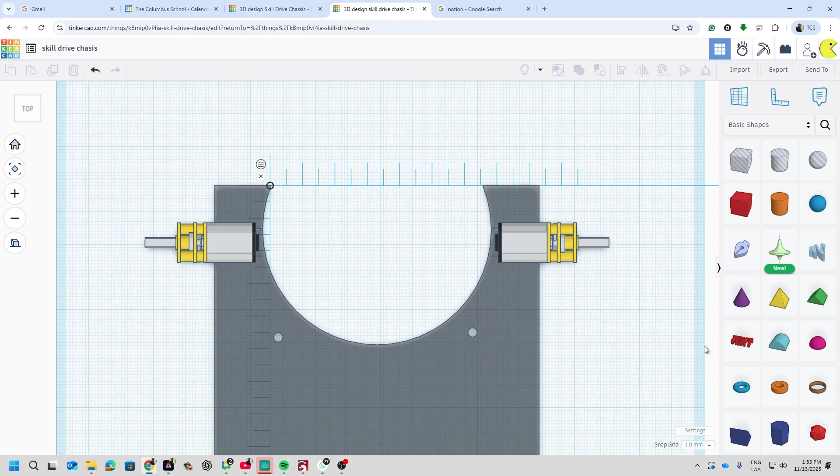Okay, so let's take back our project. Remember that every time we work on this, we are going to try to elaborate this chassis. This is the chassis that you guys are going to do for your skill drive robot. Okay, so we have the one that we worked on last class.

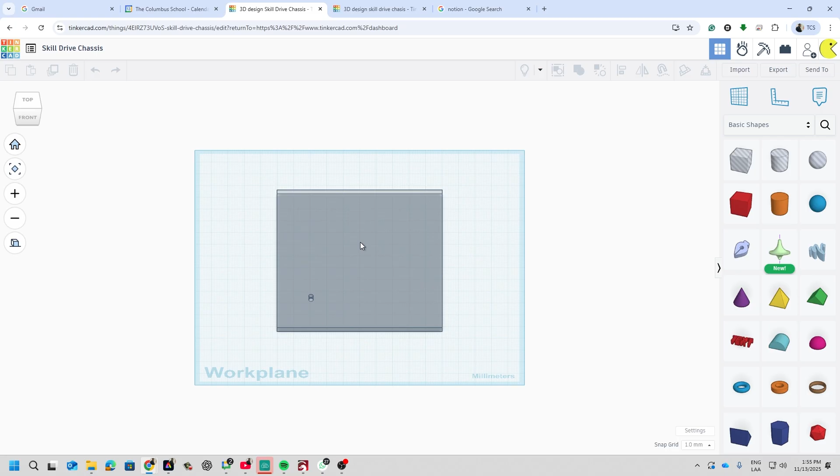We're going to click on the home button. Remember to look at your design, it's here. If you need to look up your username and password in order to start Tinkercad, I recommend you look at the sheet of paper that was given to you last class. Okay, so all of us are here.

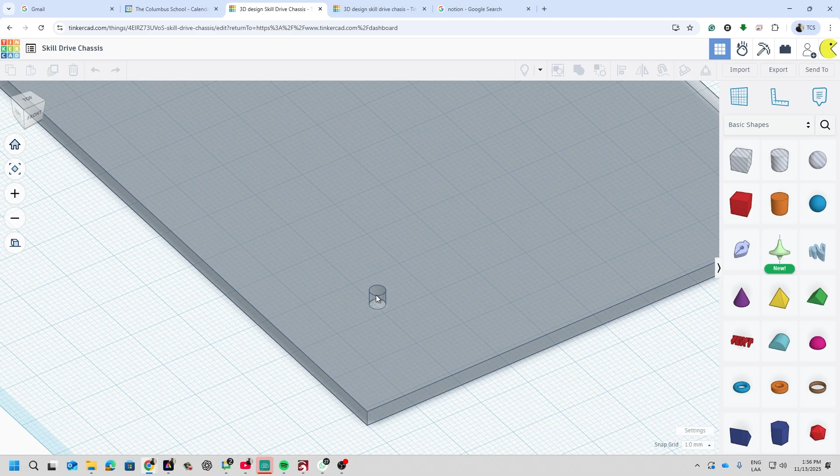We want to start working and creating the chassis. So first of all, let's take away this hole. You can just double click on it and select the solid that you guys created, then just delete it so we have the sheet of plastic.

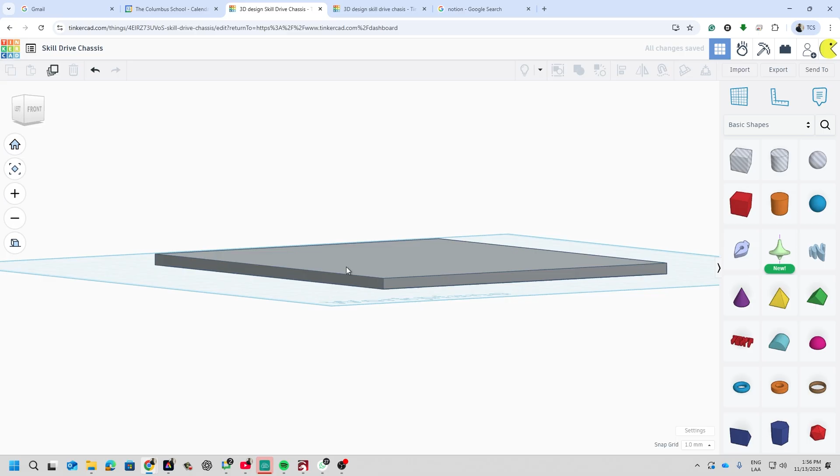Okay, so basically we have this. Quick reminder, we can change this to a solid and take off the transparency so we can see it as a pure solid layer. Remember this is 3 millimeters, okay? And I'm going to show you how to measure, okay?

So click on the top view, and if you click on the top view, you're going to have a ruler on the top right, and this ruler is going to allow us to make some measurements. So we can have it to the left, bottom, or right. We're going to keep it here so we know exactly what are the measurements of this object.

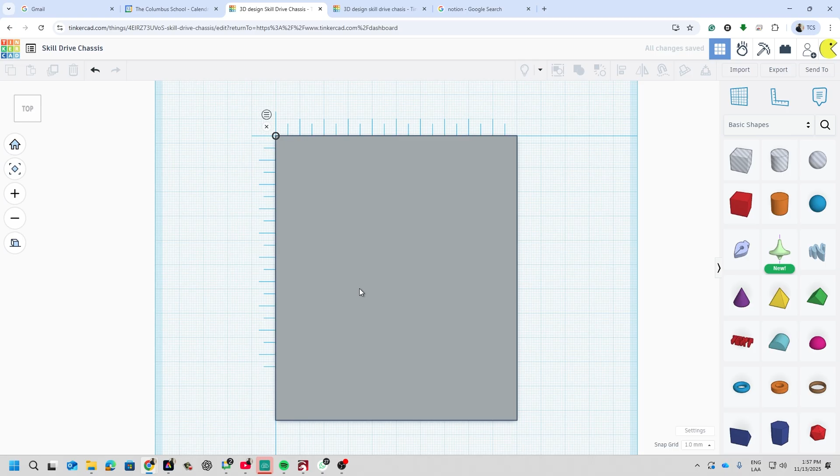So I clicked right on the corner of the object, and I can really quickly find the width and the length of my design. In this case, it's 100 millimeters and 117 millimeters - 100 millimeters wide and 117 millimeters long, okay?

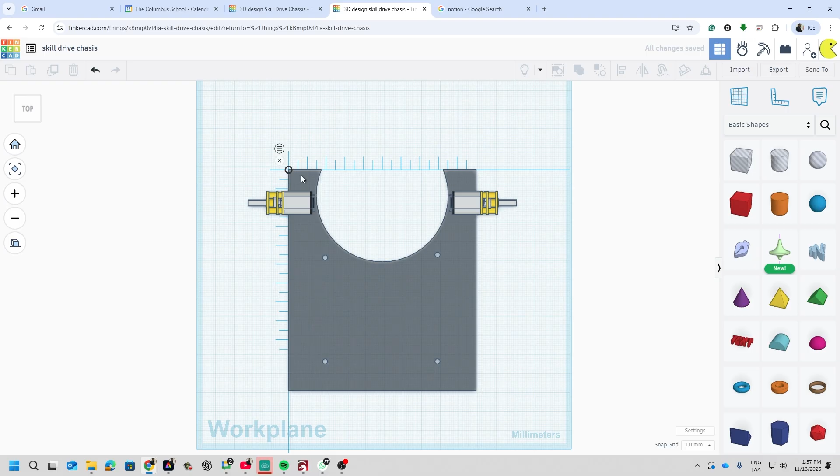And I can also set up, like, if I want the midpoints, it will show me the midpoint of this object, okay? So I'm going to move to the one that I already created, and I'll do the ruler again, and check what are some dimensions of this object. As you can see, it's 100 by 117, and the midpoint of this is kind of like 50.

So this is the center, and here I'm going to find out what is the radius of this object, okay? So I'm going to just erase this, and move my ruler right here, and then I'm also going to select, and what I can see is that from the center point, it's 58.5, and I also have some other information that I can get.

In this case, if I click on this button, I can see that it's 17 millimeters from the side, where I can see these holes that I'm going to create. I can also see, if I click again, that from the center to the hole it's 33, okay? And then I can modify it again and see some different information about it, okay?

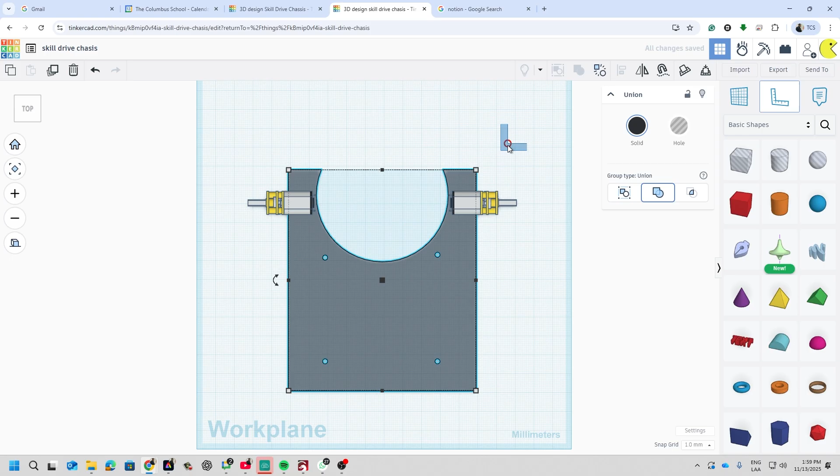So, let's see if I have others that I can choose. Let me see if I can click right here, and then I can see some other measurements. Okay, so after measuring and making sure what this circumference is, it's 70 millimeters of diameter. So we're going to create that same structure right here, right in the middle.

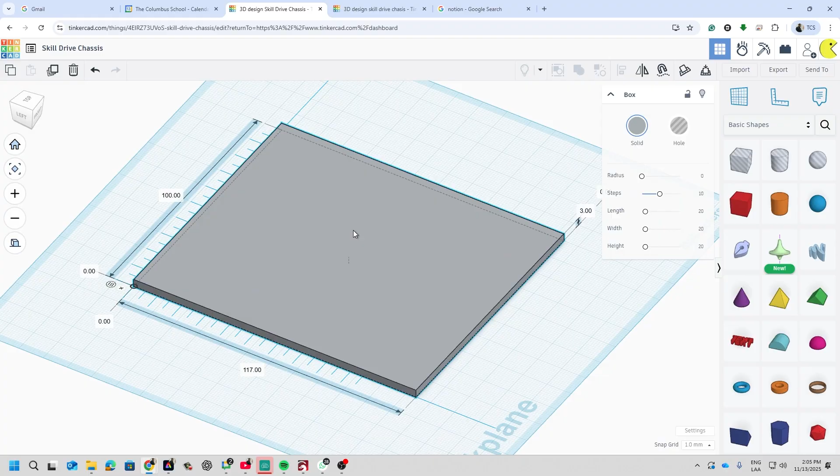Okay, so let's draw this right here. I mean, you just have to make sure - remember that you can define where to put it.

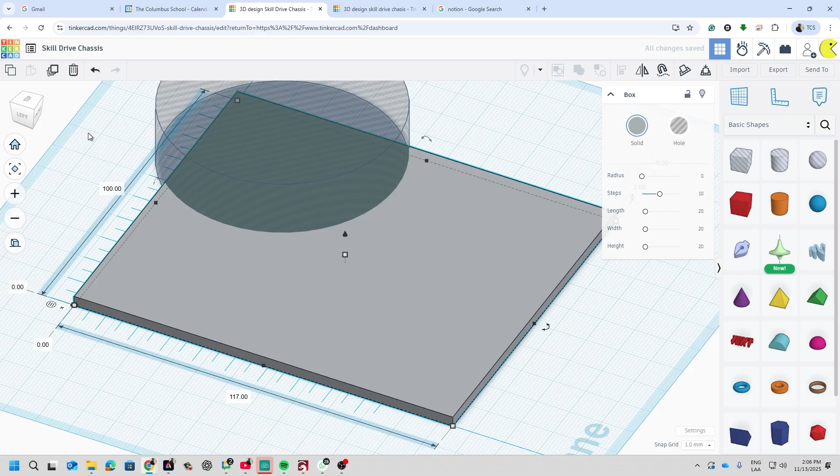Okay, we're going to create the length and the width of this cylinder. Remember the length and the width, and then just in order to make it right in the middle, you can always...

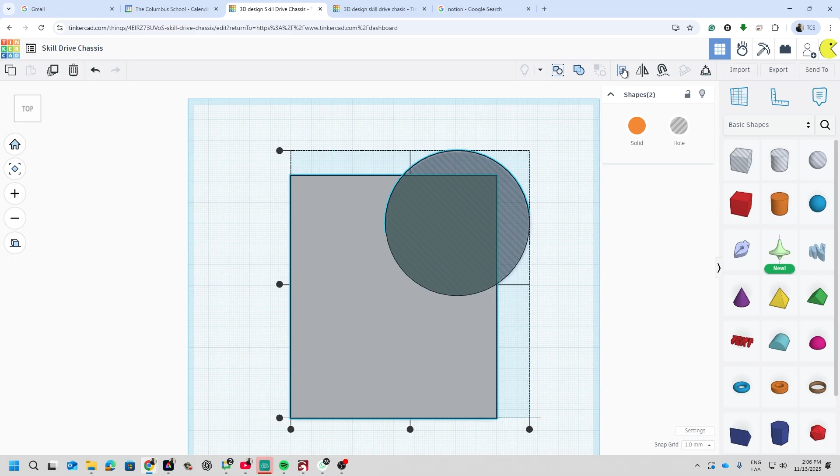And I showed you this last class, you can align the objects. The most important thing is that you select the two objects with the shift button pressed, or you press shift and click on the other one, and when you have the two objects selected, you can align. Now, alignment can be right in the center. That's the most important thing.

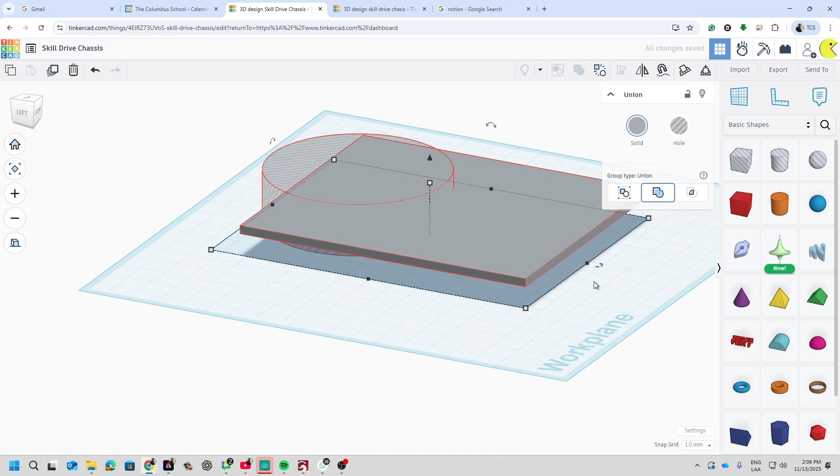And then we are going to align this right here. That way we can cut out this piece that you see right here. So let's cut it. Remember that we can just select the two objects with the shift button pressed and then click on group. When you click on group, you're going to see that there is a nicely done hole.

Got it? Then you want to make sure that your design is complete. So we are going to open the hole again. I'm just going to pull this a little bit in right there. And then, as I said, we select, we align right in the middle, and then we make the hole by selecting both of them and then just clicking on group.

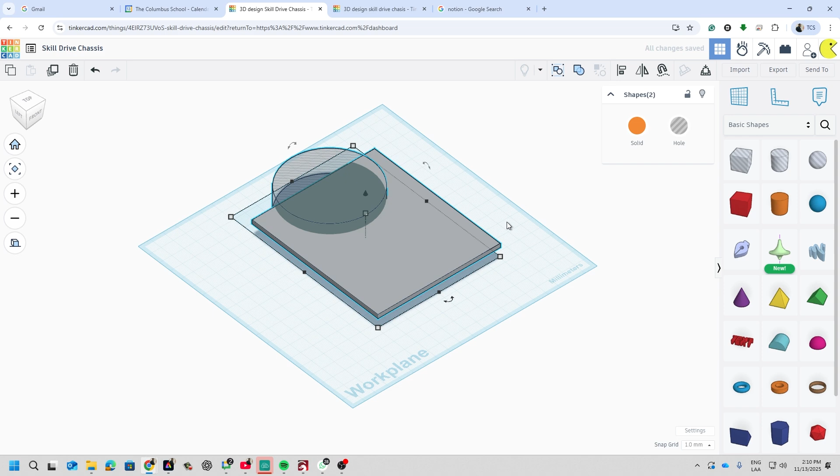Okay, so after you have the hole, we are going to add some motors. Some motors can be found where you see in your library. There is one that we can find called, there's hardware, there's electronics. If we look for electronics, we can see all the shapes.

And we're gonna scroll down until we find the motor that we need. Here are some motors, so we're very close. Hopefully we can find that special motor that is the same one that we use in every project. So we have a servo motor over here. Let's see if we can find the other motors.

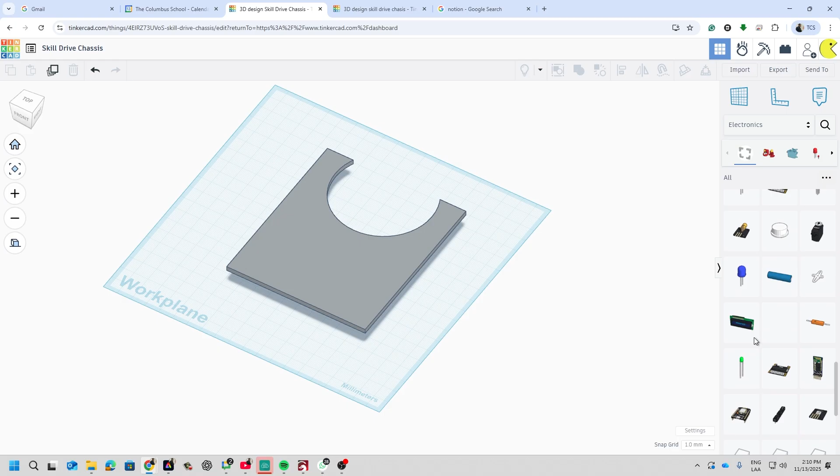There we go. So this is the one that has a yellow gearbox, okay? And I'm gonna rotate it in a way that I can put it 90 degrees, and then I'm gonna put it right here. As a matter of fact, I like to move objects from the different planes. So here I'm gonna put this one over here, okay?

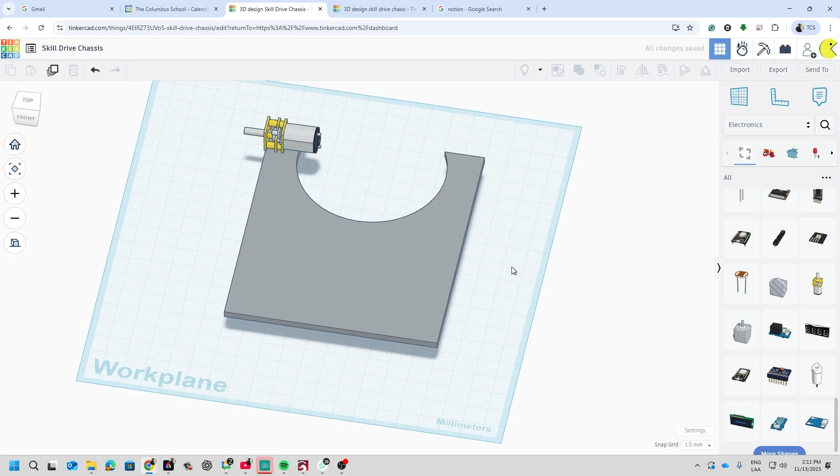So I have this motor. As you can see, this motor has to be rotated again, so it's flat, 90 degrees, and then we have to pull it to the edge, okay? So it will be on this edge right there.

And check this out. If we want to create a mirror, we select the object. We're gonna mirror this, okay? And here we can actually turn it around. We're gonna mirror.

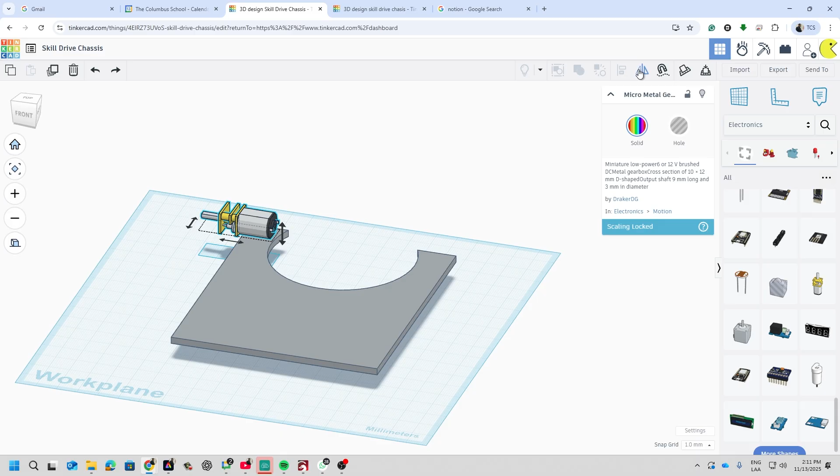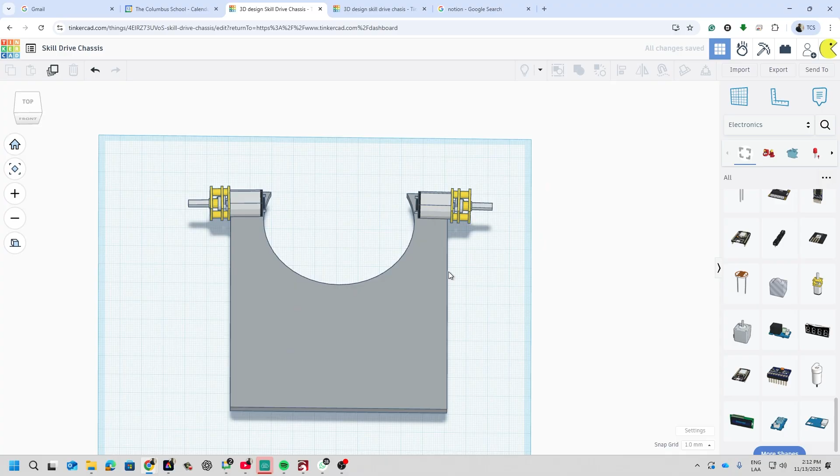So after placing the motor, we're just gonna click on it and we're gonna duplicate this motor, right? Then we're gonna mirror this motor, click on this arrow, and then I'm gonna move it all the way to the other end, okay? That way I have my chassis, okay?

Now you guys next class are gonna start building this chassis with the holes, and I'll show you how to create the holes using the sketch library, okay?

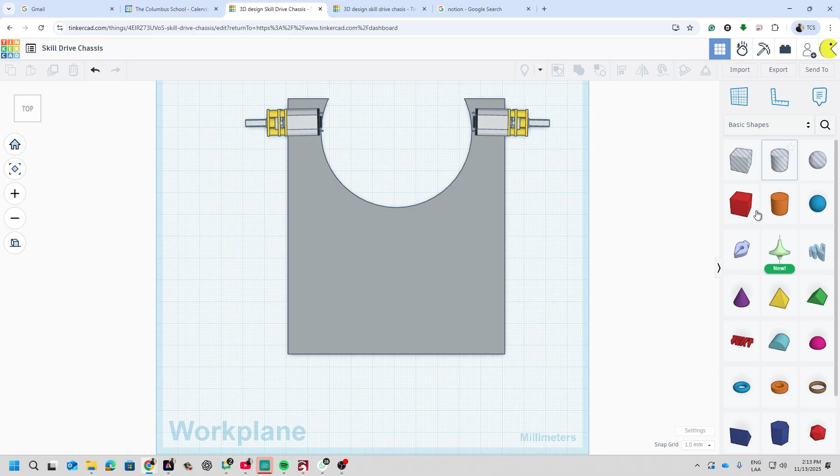You're gonna go and you're gonna create a new sketch. Just so you know, since last class we're gonna finally complete the sketch with all the points. Creating a sketch is very easy. It allows you to create any drawing, any lines, complete lines with a simple sketch. And when you finish the sketch, you can actually create an object with it, okay? This is how we're gonna do our holes. We're gonna create holes. Okay, guys?